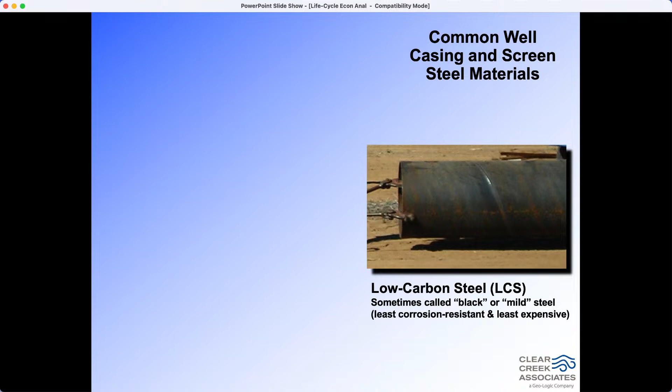The next steel type is high strength, low alloy, also known as Cor-Ten or Kai-Well steel, or the old cable tool term for hard red steel, same stuff. And what you see a photograph there of is the U.S. Steel building in Pittsburgh, which is made out of this. And what it does is get a veneer, a protective veneer on the surface of the steel because of oxidation. And that, of course, oxidizes very quickly, gives the red color, but then it further protects against greater corrosion. So it's more expensive than low carbon, but also has a greater longevity.

It lasts longer. And then the third steel type is stainless steel, of course the most expensive and most corrosion resistant. Now, there's different types of stainless steel, there's 304, 316, etc. In this talk, for the cost we're talking about, it's all 304, the least expensive and most common type for well screens.

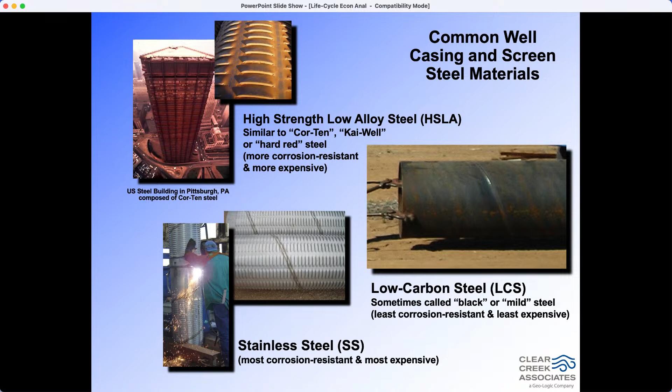So these are the three costs, and we want to compare them to one another. So let's go to the next slide. And here's another consideration that we need to add to the corrosion resistance, and that's the tendency of these screens to accumulate biochemical scale accumulation.

In many locations, we might have a low carbon steel at one location and a stainless steel very nearby, so how do we compare those? It may have been installed at different times in slightly different hydrogeologic environments, by different drillers and so on.

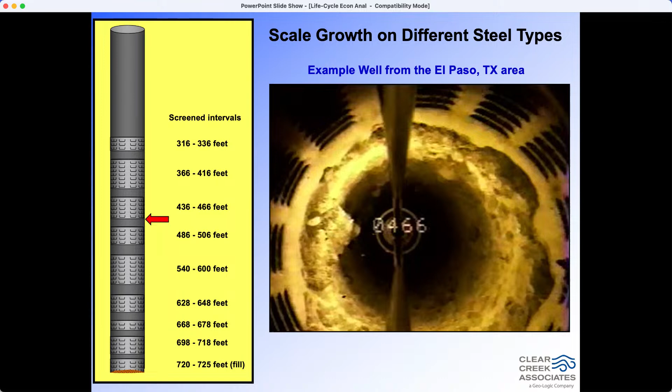So that means that if we have to lift that water higher, we're not only going to move off of the pump curve and probably get fewer gallons per minute, but we're going to be spending more energy dollars to get that water to the surface. That can add up, certainly over a life cycle, to really tens of thousands of dollars per well.

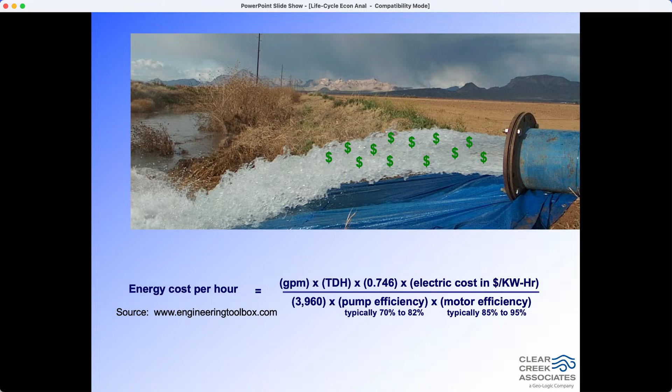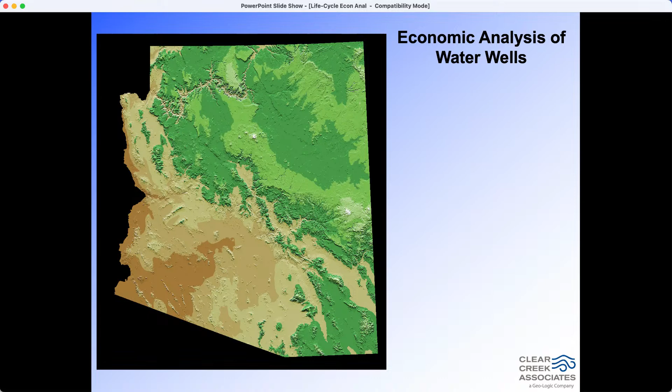So we'll see what I incorporated in this economic analysis. I've done this a couple of times, but for this one, what I did in 2012, gathering the information in 2011, I looked back in time at 70 existing wells. We had 70 wells, and you see where they are within Arizona: 8 different drilling companies, 5 different hydrogeology consultants, spanning an 18-year period.

So we had a pretty good record looking back in time, and that provided us some understanding of how costs varied over time. We also wanted to look forward in time, that's the life cycle economic analysis. For that, we averaged some recent year, within the last 5 years at that time, O&M costs, provided by the city of Phoenix, so we knew we had actual, reliable, real-world costs. We looked at the current, 2011, material costs, incorporated that, and the actual drilling costs.

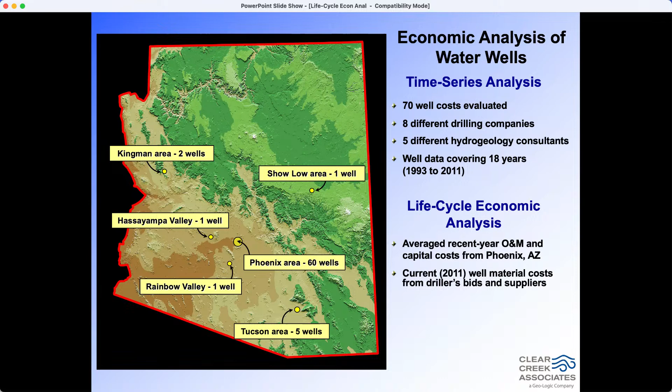Here's the 3 imaginary wells that we compared to one another. We wanted to keep them focused only on the well screen differences, so we have the same depth for all the wells, the same diameter for all the wells, and the same aquifer conditions for all the wells: an 18-inch diameter well, 1,200 feet deep, with a 400-foot static water level.

This is because it's a typical scenario for my area; it might be different in different places, so if you were to do this in your local area, you'd want to apply the representative scenario. They all have low carbon steel upper blank well casing, but the one on the left has a low carbon steel screen, the one in the middle a high strength low alloy screen, and the one on the right a stainless steel screen. So we can now compare these to one another and look at them through a life cycle.

So we have assumptions that we apply to all three of these wells. The general assumptions are, first, we're looking at a 75-year life cycle. If we had a power plant or an industrial facility with a 20-year facility life, we'd look at a 20-year life cycle. Or maybe we could look at a 100-year life cycle. It's a determination you want to make up front because it does make a difference.

Next, we assume they all pump 1,200 gallons a minute, and that they're being pumped 65% of the time. This is real world from the city of Phoenix. Next, specific capacity—we made a reasonable assumption for our area that it starts out at 20 gallons per minute per foot of drawdown.

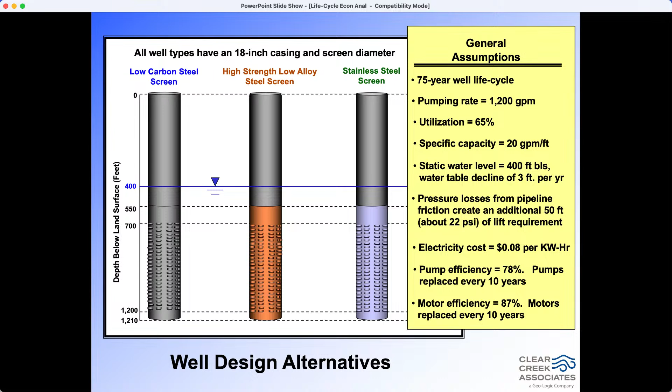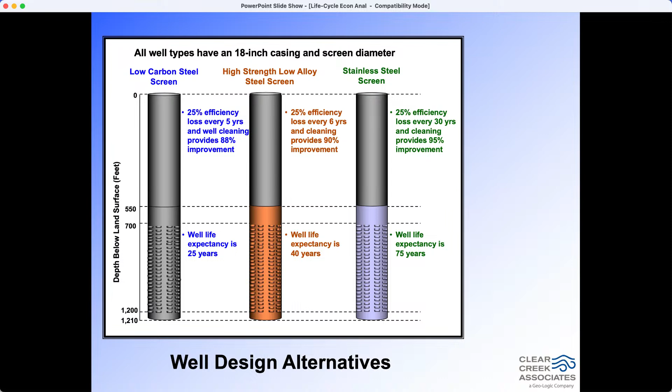So here's the way this graphs out. You can see this is for the low carbon steel well, starting at 20 gallons per minute per foot of drawdown. On the vertical axis is the specific capacity, and on the horizontal axis is time. We lose our specific capacity after 5 years, 25%, so we've gone down to 15 gallons per minute per foot of drawdown.

Then we clean the well. It improves, and then degrades again for the next 5 years, and the next 5 years, and the next 5 years. On each of these cleaning cycles, you can see that we were at 88% of the previous specific capacity—that's where we came up with those numbers. Then after 25 years, we replace the well, and it is assumed to provide a performance 40% better than the previous highest specific capacity. You can see where that comes from.

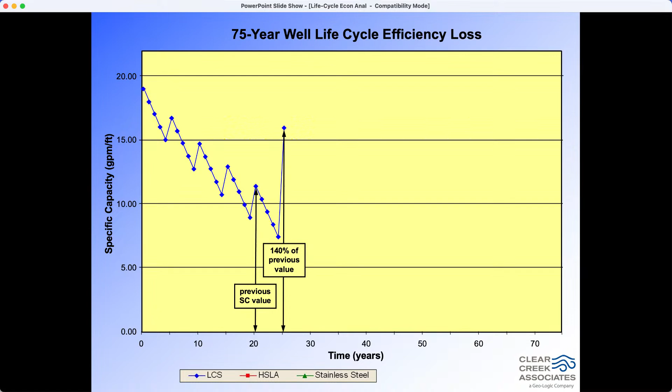It shows where we come up with that. So we take the last specific capacity, and 140% of that value is where we assume the starting point is for the second well. Go ahead and click again.

And now we have the second and the third well over the 75-year life cycle for low carbon steel. So this is where we came up with all this.

And then click again, we have high strength low alloy. It's similar, except that it takes 6 years instead of 5 years between each cleaning cycle. And we can go all the way till the 40th year before we replace the well. So we only have 2 wells in this 75-year life cycle instead of 3 wells for HSLA screens.

And then lastly, click one more time, and we have the stainless steel wells. It lasts the entire 75 years and only needs to be cleaned every 30 years.

So this is the way it plots out, and you can kind of see from this plot, because the area under each plot is the energy use. So there's going to be less energy use when the specific capacity doesn't drop as far down as much of the time, and more energy use for like the low carbon steel where it's really degraded a lot of the time over its life cycle.

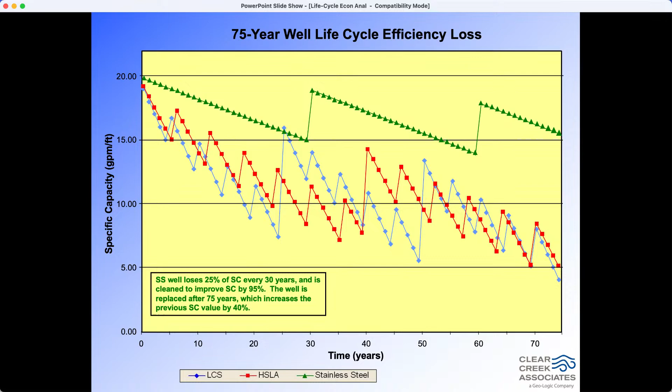So let's go to the next slide. And here's what unfortunately everybody focuses on, the low bid mentality. So we took these values. Unfortunately, wells don't cost this anymore.

They're much more expensive. But back in 2011, based on a dozen low bids from the previous 5 years, here's what wells costed of this design. And we used for all these wells the current 2011 numbers with a contractor markup for our cost estimate. So this is where we came up with these numbers.

We did not include land acquisition. We assumed that the owner would already have land, because that complicates things so much. But we see here low carbon steel are roughly $512,000 for one of these wells. This is a 1,200 foot deep, 18-inch diameter well.

HSLA about $567,000, and stainless steel about $776,000. So we have more than $250,000 difference between stainless steel and low carbon steel just because of the difference in the screen material.

So that varies year by year, and it varies over time, and it varies depending on the supply and demand. But generally we can say, okay, here's what it is, and we can apply these numbers for today and re-look at it.

It's going to be on that trend, though, that these costs, you start higher with stainless steel than you do with mild steel or even HSLA, but will it pay for itself? You know, that's the question we were asking ourselves.

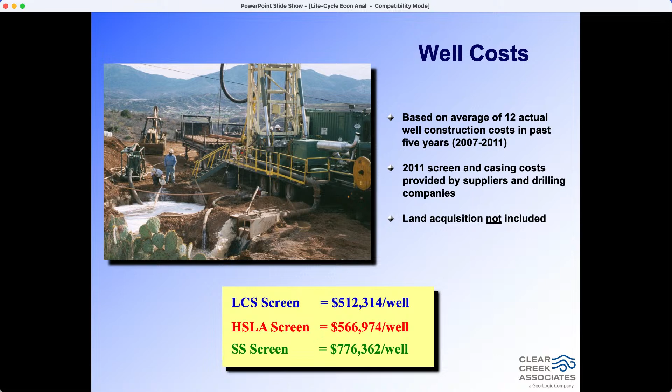So go to the next slide. And we had some other cost considerations because we wanted to be complete. So let's throw those in. We started with the well construction cost.

Next one. We added some supplemental things just to be complete: sound abatement, fluid disposal, demolition of existing equipment.

So the consultant cost. The hydrogeology is a lower cost. The engineering is a higher cost. I never figured out why that is, but it tends to be the case. But we applied those.

Geologists are cheap. Yeah, I guess so. We're low bid. Yeah.

So the well clean, we put those in each time, and what we did was alternate between mostly brush and bail, sometimes acidizing, just alternately. For the stainless steel, because it was less common, we always applied the cost for acidizing, which is much higher than for brush and bail.

O&M labor cost. That's pretty much the same for all wells, but we applied it. And next, pump and motor replacement.

That happens every 10 years. We do assume that for the first years of a well, we don't apply any wear and tear, because there's probably going to be a new pump and motor. So for those wells that are being replaced more often, there's less pump and motor costs. So that kind of actually offset things slightly, but it's real world.

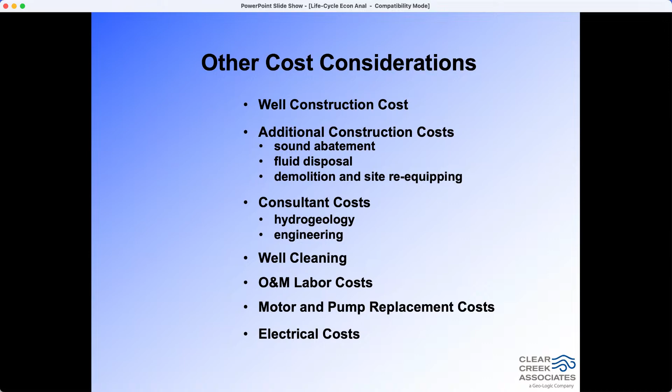Next, electrical costs, that turned out to be a big one when you're looking at it over 75 years. And then the last, oh, we go to the next here.

Okay, so here's the punchline. After 75 years, if you look at that top row, up beside the little cartoons of the wells, you have again just a repeat of the construction cost.

So we started with the stainless steel on the right-hand column being the highest cost, but then in the first row, you see what happens when we add up all these other costs over 75 years: the low carbon steel well costs about $15.7 million, the high strength low alloy well about $14.5 million, and the stainless steel well about $12.4 million.

So if we oversimplify the math and just divide by 75 and look at per year well cost, you see the second row, and that means that at the end of 75 years, as shown in the third row, you spend actually more money by $3.3 million for a low carbon steel well than you did for a stainless steel well. And when you compare it to HSLA, it's over $2 million more compared to stainless steel.

And so the last row there is the cost per year. And so we can work out what's the payback period based on oversimplified math. In other words, we're just dividing by 75 years. We're not looking at it year by year more detailed, because that was going to be a lot of extra work that I didn't want to do at the time.

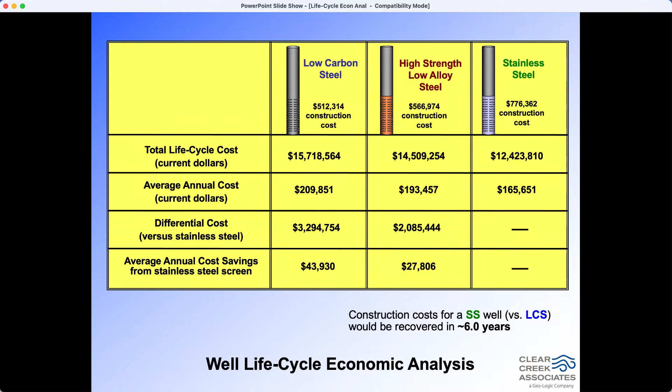And so I'm feeling like this must be a reasonable study. And actually what I've done is gone to economic people. I'm not an economist, and asked them if this is the right approach and everything, and did have it confirmed that that's the proper approach to use for this.

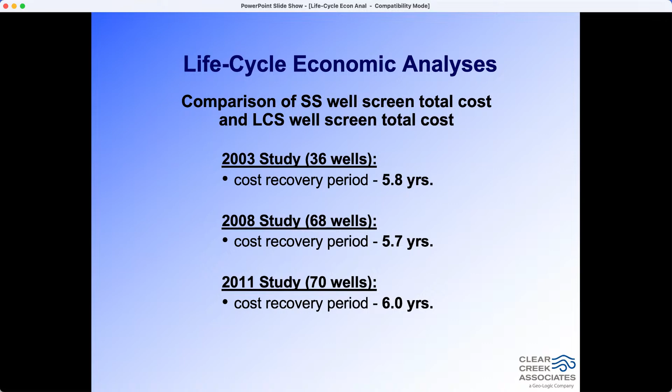So I think that's the last slide. If you can click comments, yeah.

So the only walk away with this that I get is that don't think about just the cost of the installation of wells. Think about the entire life cycle, and realize that this was for Arizona, for municipalities mostly. What if you're in Tennessee? What if you're looking at a household well? That might be a completely different scenario, but you can still look at what's the life cycle cost, and there's other data that you can input, and you may not know it, but you can make reasonable estimates.

And this is information that once you package it together, you can then roll it out to the well owners. They don't know. They just think, wow, this costs more, and they all make water, and then they don't even know about scale accumulation and things like that.

So the energy costs is the deadly one, I find. People are paying way more in energy costs and maintenance costs, and they think, well, I got the cheapest well. It's the same one, it's just as round as all the others, and it's dark down there, so I don't know what's going on. So that's the problem.

So I think that with that, I'll be glad to field any questions folks might have.

Yeah, I haven't had any pop up here, but I got some. So, you know, I want to.

We really get into this low bidder mentality and the lowest cost up front, because, you know, when people are talking about 75-year lifespans, it's kind of like, well, I'm going to be retired long before then, so it's probably not going to be my problem. So how successful are you at convincing water utilities to look at this? I mean, usually I see a break point between some of the bigger water utilities and the really small ones that are really pinching pennies. So this really resonates with me, and I kind of preach this to everybody I talk to.